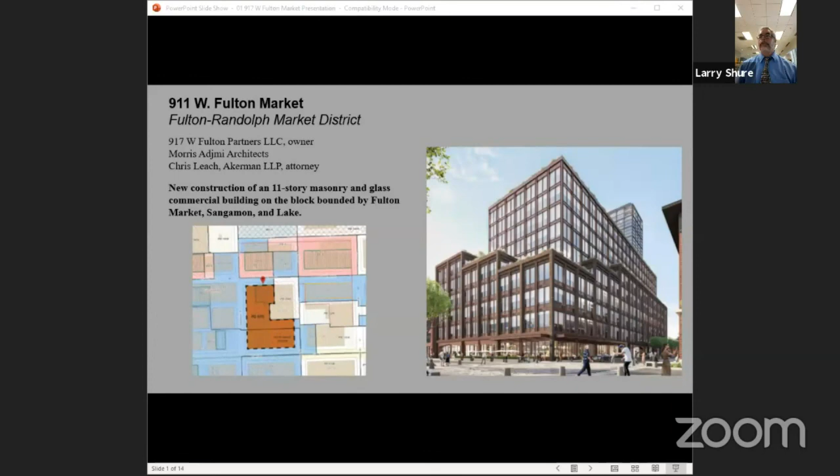The historic 6-story Davis and Rankin building at 900 West Lake is proposed to be incorporated into this development. While no changes are proposed for the primary south and east elevations, the applicant intends to connect this building to the new development through an atrium on the west elevation.

The upper floors of the building are proposed to be connected through a series of sky bridges. Where connections are proposed, the existing window openings will be extended downward, while the current window heights and widths will be maintained. Because these modifications are on a secondary elevation, maintain much of the original window openings and proportions, and will only be visible from within the atrium, staff recommends approval.

The roughly rectangular footprint of the proposed new construction is approximately 335 feet along Sangamon, 150 feet along Fulton Market, and 125 feet along Lake. The first 4 floors of the building extend all the way to the property line, maintaining the historic street wall found within the district. The heights of the lower 6 floors respond to the historic floor heights found within the district by stepping up and down in height, and the applicant has provided exhibits to better clarify how these heights relate to the adjacent historic buildings and infill construction.

The applicant has provided exhibits to illustrate some historic examples within the district which utilize changes in height on the primary elevations, and staff supports the proposed configuration.

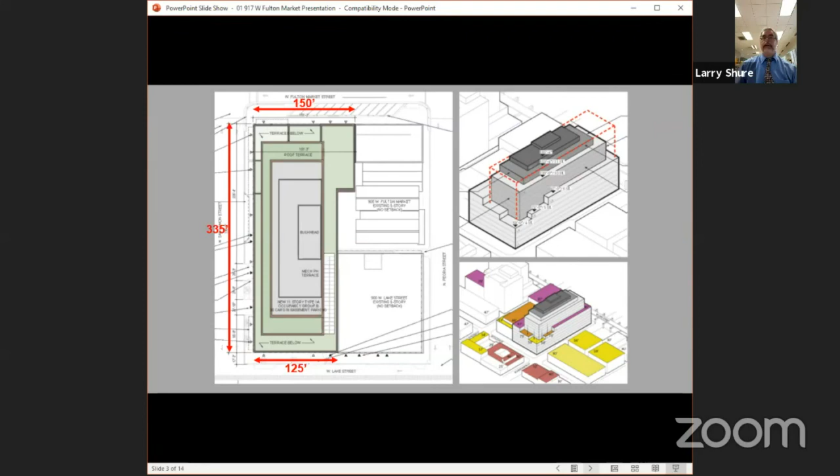In June of 2019, the committee approved a 12-story new construction building at 1043 West Fulton Market. The design incorporated a masonry structure approximately 91 feet in height and a taller inset tower with a height of 138 feet 4 inches. This building filled an entire block and did not abut any historic buildings.

The proposed 11th floor for this project creates a maximum height of 153 feet 4 inches, which exceeds the previously approved maximum height at 1043 Fulton Market by about 15 feet. Although this is a substantial increase in height, the size of the current site is more than 3 times larger than the site for 1043.

In order to address staff concerns about the visibility of the 11th floor, the applicant provided renderings from a number of vantage points within the district. Although not visible from directly in front of the building on Fulton Market, the 11th floor will be visible from areas further east on Fulton Market, south on Randolph, and north on Sangamon.

However, given the scale of the building, the overall design, the varying setbacks of the floors which break up the mass of the building and respond to the adjacent historic structures, staff recommends that the additional height will not adversely impact the historic characteristics of the district and that it be approved as proposed.

The applicant proposes a design which is informed by the historic modules and proportions found within the district. It incorporates primary and secondary vertical piers and inset spandrels. The upper floors have a more regular vertical pier width, contain large windows with a central dividing mullion and horizontal metal spandrels. The lower floors step up and down, which allow for the incorporation of outdoor terrace areas.

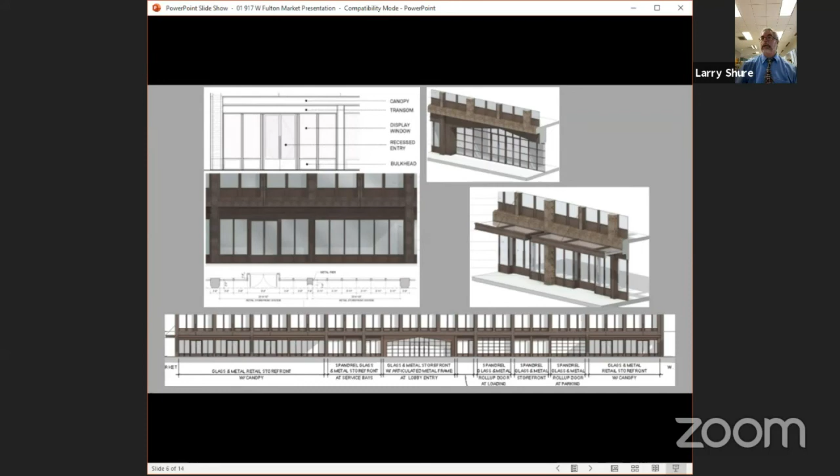The applicant proposes several metal and glass canopies, 1 on Fulton Market and 3 on Sangamon. These canopies span 2 storefront bays and are steel channels with etched glass roofs supported by diagonal metal struts. Because canopies historically provided protection for loading and unloading wholesale goods in the district, staff recommends approval of these new canopies as proposed.

Here are a couple of elevations just to give you an overall sense of the building. This is along Fulton Market, showing the step up and down of those lower floors, the inset 11th floor, and the mechanical enclosures above it.

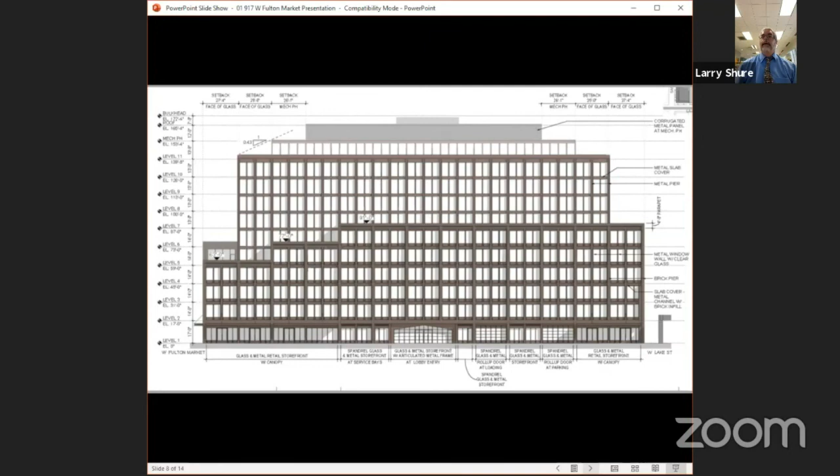This is the Sangamon elevation, again showing the lower brick floors and the metal clad floors above that. And finally, here's some sections and elevations of the east elevation. On the lower left on the upper image is the historic building to be incorporated into the project, and the bottom below that is a section.

So we are recommending approval with a number of conditions. First, that the quality of materials and design details as approved are important features in meeting the Commission's guidelines, and any significant changes to the approved design would require further review by the Permit Review Committee. Second, that the permit drawings shall include dimension details for all windows and storefronts, as well as brick patterns and mullion details.

Third, historic preservation staff shall review for approval all material samples prior to permit application. And fourth, that any signage, including any exterior lighting, shall be permitted separately and reviewed and approved by historic preservation staff prior to order and installation.

So that pretty much concludes my presentation. If there are any questions on that. Otherwise, I know that the development team is also at the meeting and they can also answer questions.

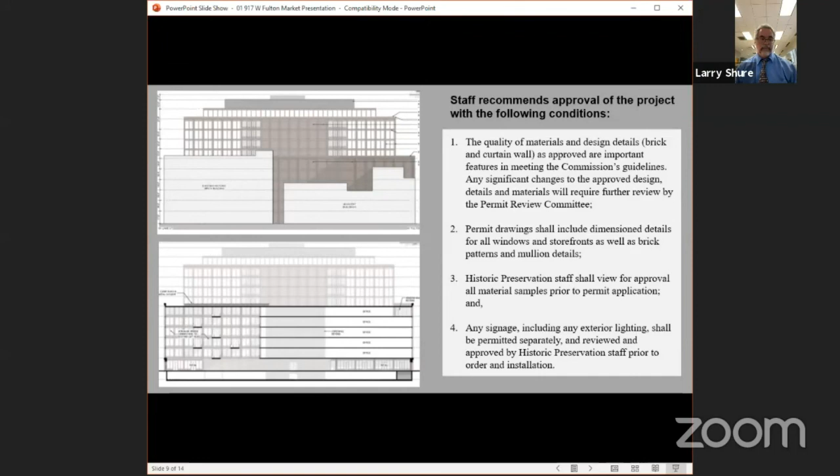Thank you, Larry. Commissioners, do you have any questions for Larry at this moment? And let me make sure I can see you. I have a question. Oh, thank you. Commissioner Jakovich. Hey, hi, Larry. Thank you. Just curious if there was any.

Well, first, just to clarify, is this abutting an adjacent building? That's one question. Is this abutting a historic building? And also, was there any additional color exploration for the building? Those are my questions.

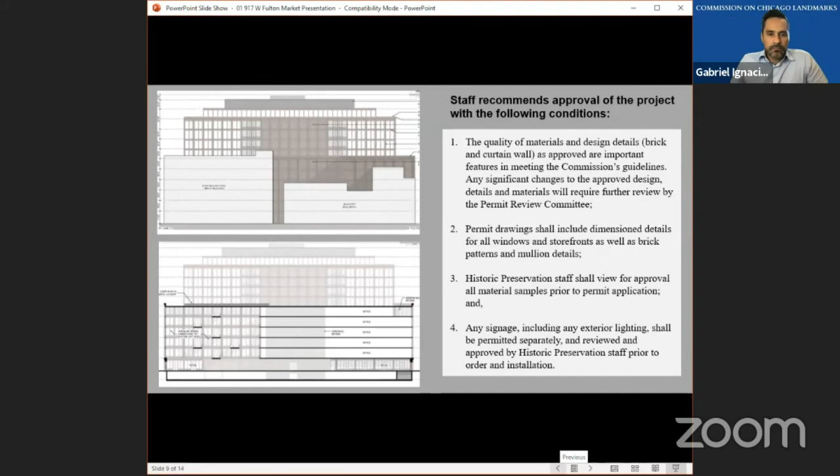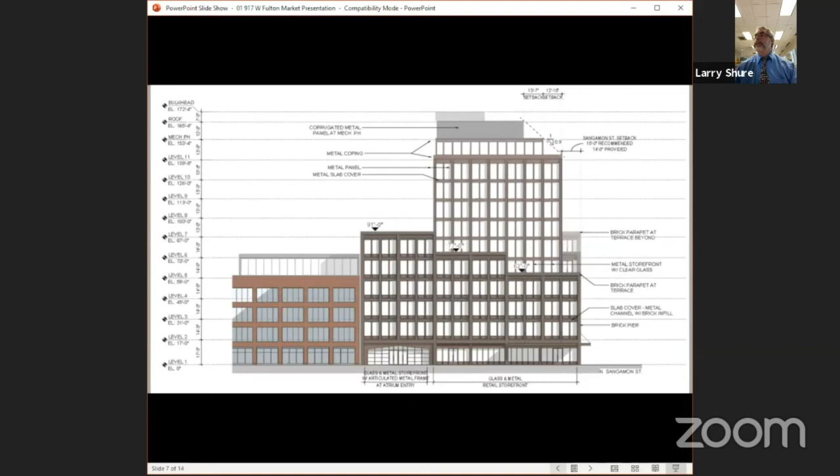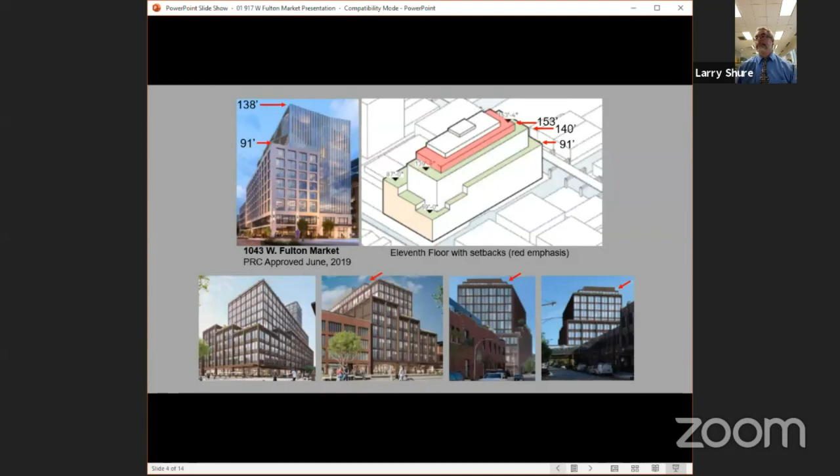So the project does abut the 900 West Lake, the Davis and Rankin building, which I think is an 1886 building. Let's see, I think there are probably some perspective renderings that show that a little bit more clearly. So it does attach to the secondary elevation, which is the west elevation of that building, and that's where that sort of open atrium with the sky bridges kind of attaches through.

Yeah, okay, this is pretty good. So this is the elevation along Lake Street, and this is the historic building. And so the height of the lower floors of the adjacent building are actually aligned with that, which actually is the tallest historic building in the district.

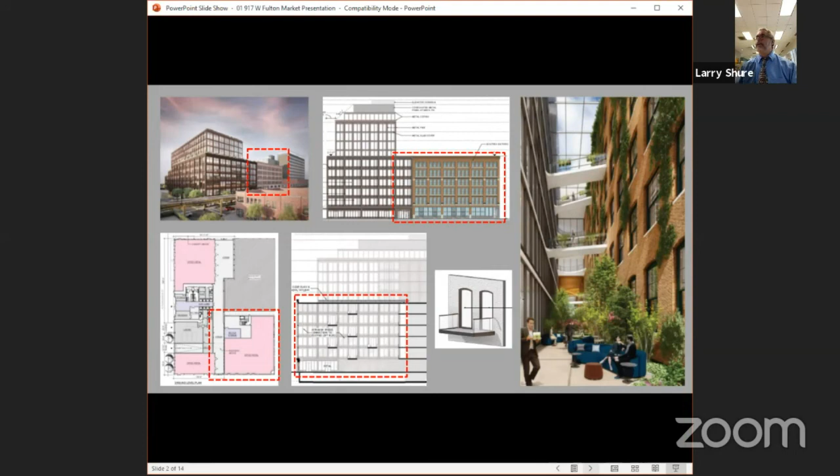As far as color goes, the initial proposal, I believe, was really for a black brick. And although there have been a number of new buildings in the area that incorporated black brick, we really didn't have much in the way of historic buildings that utilize black brick, probably because it really wasn't available. So the applicants were able to modify their proposed brick color to a dark brown, and there's some examples of that dark brown brick being used on some historic buildings in this center exhibit to the left in this particular slide.

I hope that answers your question.

Yeah, just one follow-up on that, maybe to the architect or to Larry too. With the historic building, whether there could be some acknowledgement of what's happening on the inside with the atrium, because it's not apparent on the outside, and potentially also creating a softer connection to the historic structure. We see that a lot - maybe there's a glass element that kind of opens it up and softens that connection between the new building and the old. So I'll leave that to... I believe there is a slight setback between the historic building and the new building, and I think the applicant's architects can address that better than I can.

Yeah, hi, this is Lucas Posada with Mooreside Architects, the architect on the project. Thanks for your time. I was having a hard time hearing the question, I don't know if you could repeat it. There's some echo in the background on everyone. Would you mind repeating the question, please?

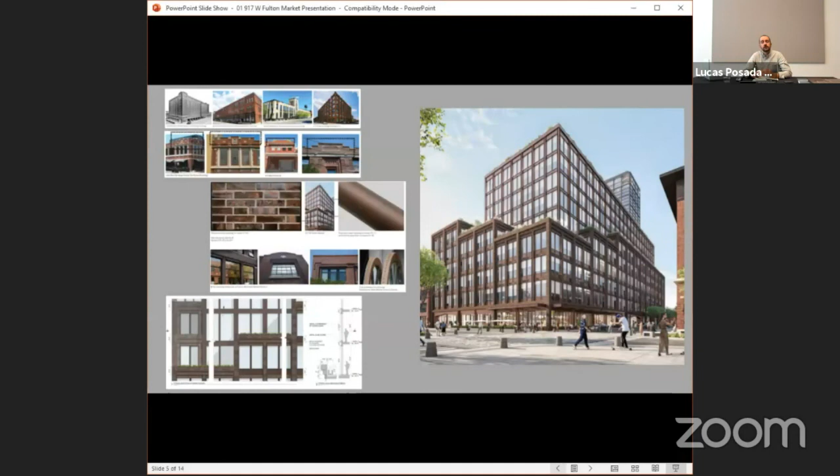So we'd probably have the parapet return, so it'd be a roof to roof type of condition, and then the skylight would be separated from that. I don't know if, Larry, if you're able to pull up that presentation—I'm happy to share my screen. I don't know if I have the ability to do that. But that's how we're envisioning that right now, so it can kind of stand apart from the historic building and just be its own system. Yeah, and there was a roof plan.

Yeah, right there. So you can see there's a little bit of a separation. We'd probably detail that so it's more of a standalone skylight, but it would be significant enough that it would really feel like an atrium within that space. I don't know if that addresses your question.

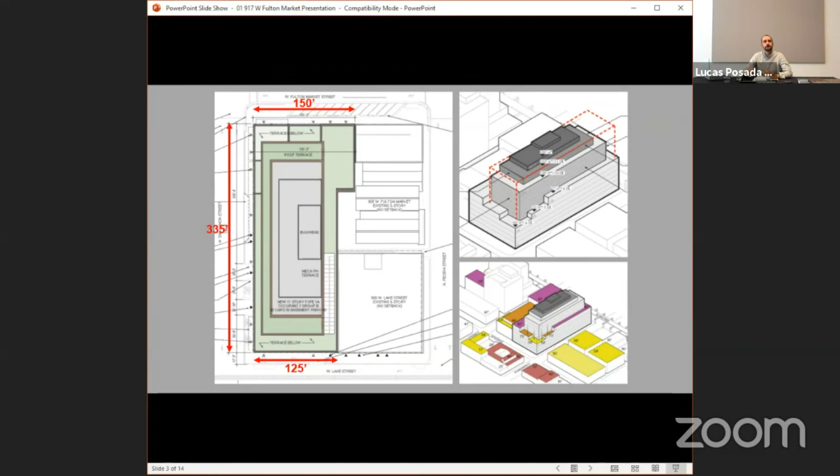Yeah, I was just flipping through the drawings here, and particularly I was curious about the detailing behind that. If you go to the last slide, it has a detail of the section.

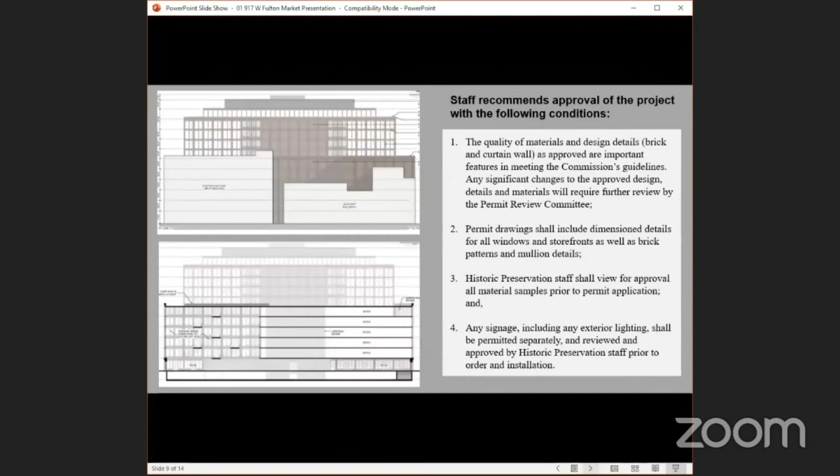If you look at the bottom left image, that's a long longitudinal section through the entire atrium. At the ground floor, you can actually connect from Lake Street, at the left of the image, to Fulton Market, at the right of the image. At the north end of the site, office floors would continue across, but on the left side, where the new building is adjacent to the historic 900 Lake building, that would be open, with just bridges connecting, and the roof coming across at the very top. So it would be open space, but not contiguous all the way to Lake Street.

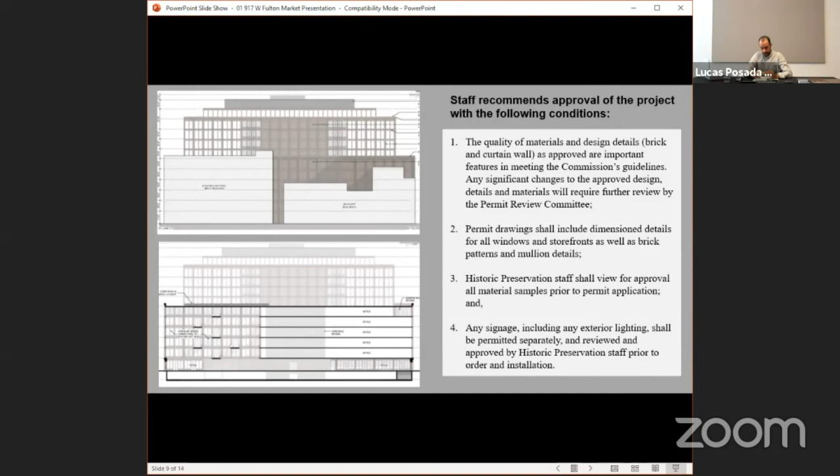Thank you, Commissioner Ponce. Commissioners, any additional questions? I don't see any hands.

If there's no further discussion, I'd like to request a motion to adopt the staff recommendations for the project. May I request a motion? I will move, Commissioner Osmann, adoption of the project. Commissioner Osmann has made a motion. Can I have a second? Second, Commissioner Hughes. Thank you, Commissioner Hughes has seconded the motion. Now I'm going to take a vote on the motion, and I will do a roll call.

Commissioner Jakovich, yes. Commissioner Ponce, yes. I also vote yes. So the motion carries unanimously.

Thank you very much to the team presenting today, Mr. Leach, Mr. Posada. Good luck with the project. It seems you still have a couple more steps before building permits, so good luck with that. Thank you very much. Thank you for being here. Thank you, everyone.

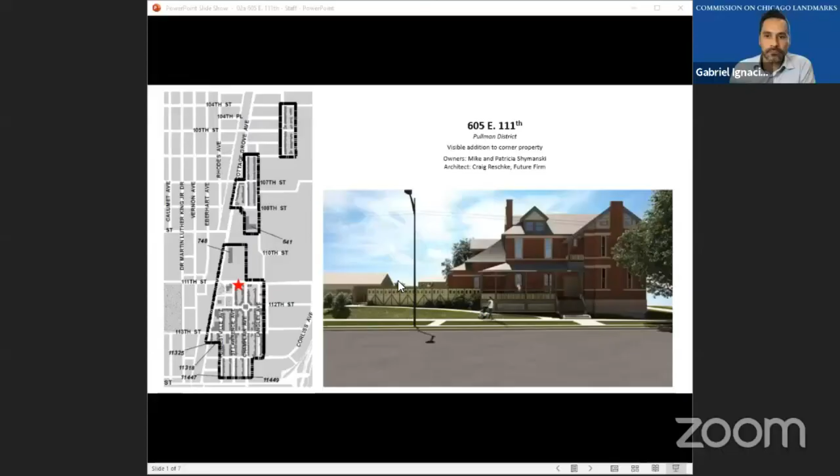Thank you, Commissioner. This property is located on the corner of 111th Street and St. Lawrence Avenue, with a 2.5-story masonry building on the site. The building was originally built as a single-family residence and was later converted to a private club for Pullman executives. Most recently, it has been used as a restaurant. The applicants contacted historic preservation staff in May 2021 to review their proposal to add an ADA accessible ramp, deck, and restoration of the front porch.

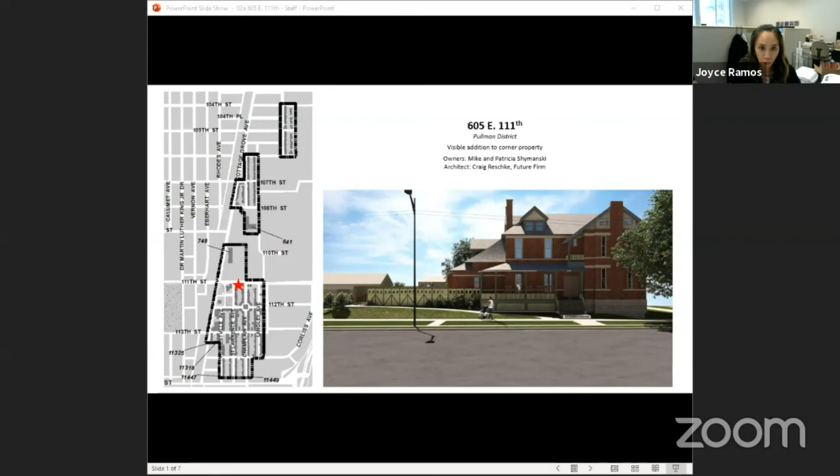The property is located on a 54-foot wide and 150-foot deep corner lot. The proposed scope of work includes an interior renovation for a new coffee shop and washrooms, and exterior improvements including restoration of the front porch, shown in blue, an ADA accessible ramp, shown in yellow, and a new deck, shown in purple, in the rear yard. These improvements will provide a key space to host visitors between visits to the Pullman National Monument and tours by the Pullman House Project.

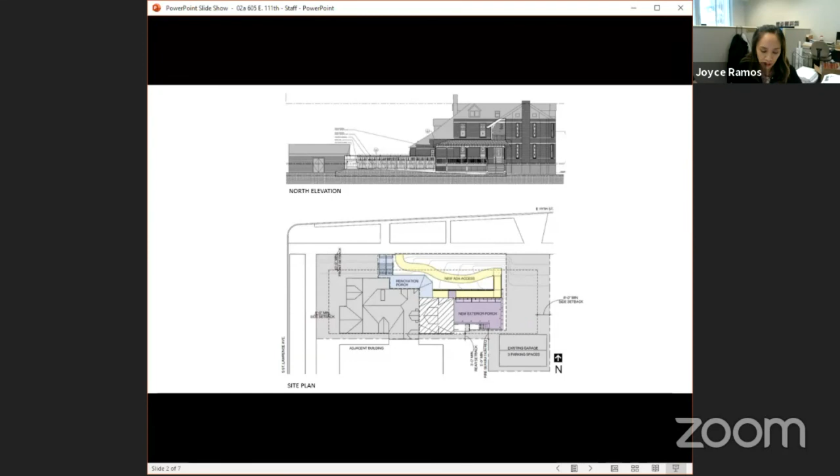The historic front porch on the north elevation facing 111th Street is currently enclosed and clad with wood boards. The applicants propose to restore the porch based on historic photographs and general historic characteristics evidenced on the building. The roof will be clad with asphalt shingles. The rafter tails will be replaced to match the profile of the existing rafter tails on the balcony above the porch. New steel columns faced with wood trim milled to match the profile of the columns above will be installed, along with a new railing with balusters matching the height, spacing, and detail shown in the historic photograph provided by the property owner. To increase the height of the top rail to meet code, the applicant proposes an additional metal guardrail on top of the wood top rail. Staff recommends approval of the porch as proposed.

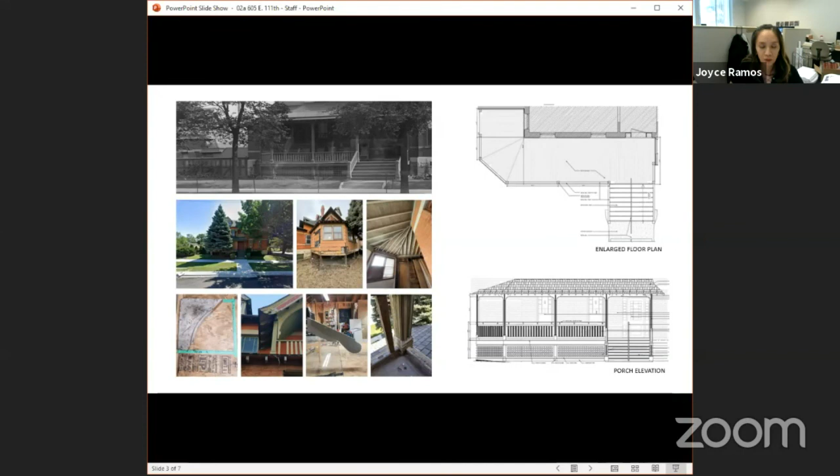A new raised wood deck is proposed off the rear elevation to provide outdoor seating for the new coffee shop. A solid wood fence with an integral Corten planter will enclose the deck on the north, east, and south elevations. Given that the proposed raised deck is significantly set back from the front facade and is sympathetic in its design and details, and does not negatively impact historic characteristics of the building or district, staff recommends approval of the deck as proposed.

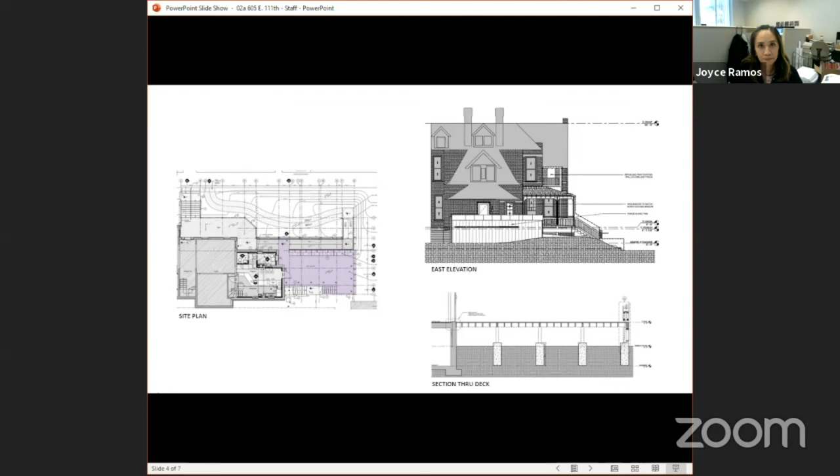The landscape will be modified to provide accessible access to the building. A concrete ramp with handrails is proposed to start at the sidewalk and will connect to a wood ramp, which eventually leads up to the front porch and deck.

A solid wood fence constructed with approximately the same design and proportions as shown in the historic photograph provided by the applicant is proposed to be installed to obscure the wood ramp from view, as well as to recreate a historic feature that was previously on the property.

The commission has approved a number of modifications to landmark buildings intended to address accessibility requirements. The commission reviews the location, size, and design of these proposals to confirm that such modifications are compatible with the landmark building and do not damage or obscure significant historic features.

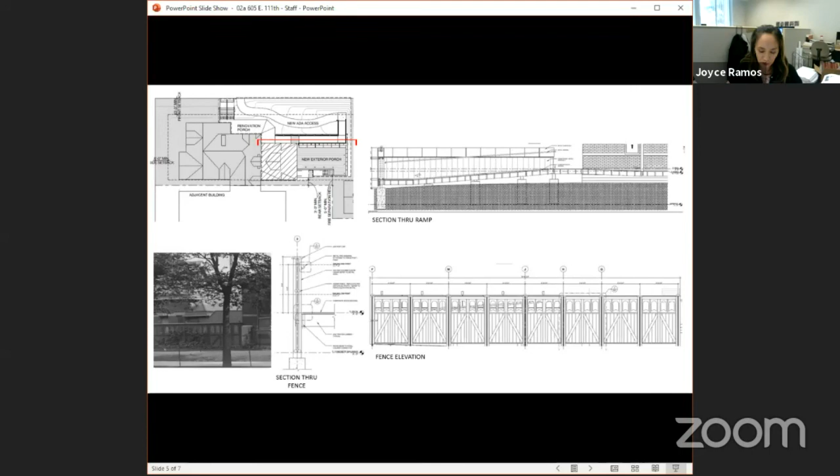Staff recommends that the accessible ramp and solid wood fence does not negatively impact the historic characteristics of the building or district and recommends approval as proposed. Staff recommends approval of the overall project as proposed.

The Alderman, the Beman Committee of the Pullman Civic Organization, and the National Park Service have reviewed the project and have all submitted letters of support, which were included in your packets. This concludes my presentation. The architect and the property owners are here if you have any questions. Thank you.

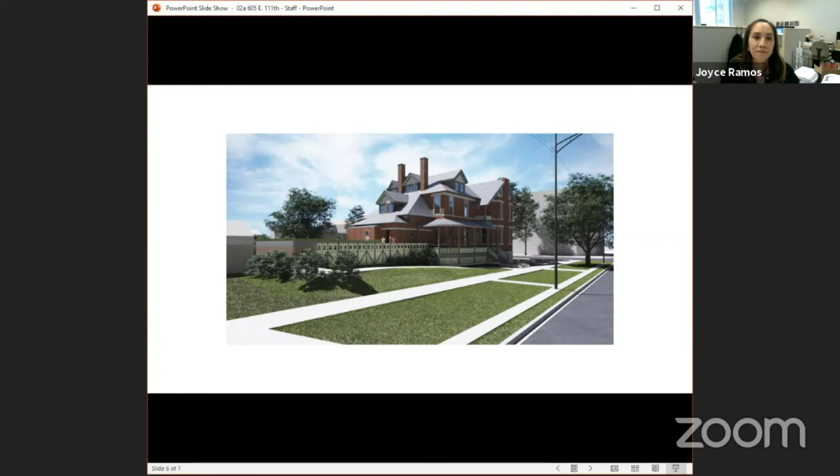Thank you, Joyce. Do the commissioners have any questions for Joyce, the staff? I don't see any hands. Okay.

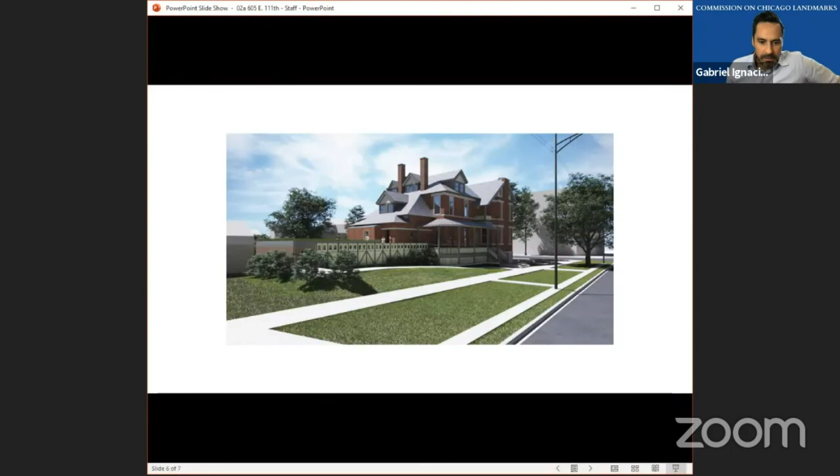Can we hear from the applicant and the representatives? Is the architect here as well? Yes, this is Craig Rushke, the architect. I believe the owners are on as well. Thank you, Joyce, for the presentation. I'm happy to answer any questions that come up.

We hear from the property owner and tell us a little bit about this project. Yes, this is Pat Szymanski, along with my husband, Michael. We own the property. The plan is that the property will be developed with the coffee shop and an accessible ramp to access the back to the deck and to the front veranda porch.

The most impactful part of the project, of course, is the restoration of the veranda and the historic fence details, which will bring the property back into compliance with what the original plan for the building was, intending to complement the project that's going on across 111th Street, which is the restoration of the Pullman factory site for the Pullman National Monument.

The historic workers gate is directly across the street from this property. So there's a good alignment, and it'll be complemented over the next year and a half by CDOT's 111th Street restoration and re-landscaping plan that's underway, with construction expected to begin in the spring.

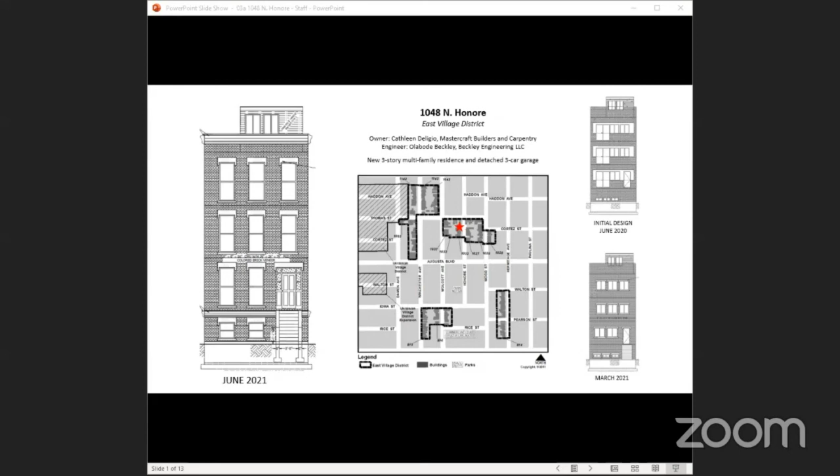Thank you, Chairwoman Aguirre. The subject property is currently a vacant lot located mid-block on Honore Street, just south of Thomas Street. Historic preservation staff received the original design submittal in June of 2020, as you can see on the front elevation on the upper right. During this time, staff has worked with the engineer to improve the design to ensure that the new building is compatible with and complements the existing significant historical and architectural features and qualities of the East Village District.

The proposed new construction project is a 3-story brick building, 40 foot 6 inches in height, with a raised entrance and a stair enclosure that leads up to the roof deck. The building is 20 feet in width and 2 foot 6 inches with side yard setbacks on the north and south. The front side yard setback is 9 foot 4 inches and is in keeping with the front setbacks on the west side of Honore Street.

The detached 3-car garage with a roof deck is proposed to be located at the rear of the property with alley access and to be clad in fiber cement siding.

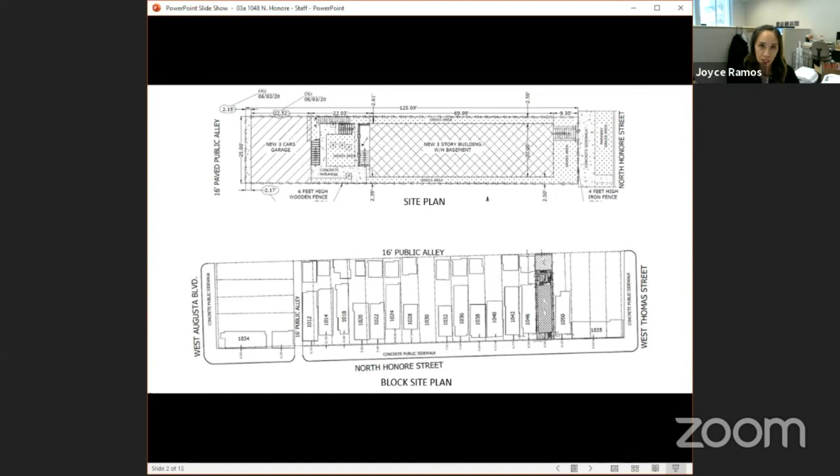Predominant historic characteristics in the district include masonry buildings with tall double-hung windows trimmed with stone window hoods. The applicant has proposed a standard size face brick in various shades of red for the front facade and wraps 6 foot 5 inches on both side facades. The remainder of the side facades, as well as the rear facade, stair enclosure, and garage, is proposed to be clad in fiber cement siding with a faux wood grain finish in a light tan color.

Due to the height of the building and visibility of the side elevation, staff recommends that the color of the fiber cement siding shall match the color of the brick with a smooth finish and a 4-inch lap exposure. Since the proposed new building is taller than the buildings immediately adjacent to it and the side elevations will be visible, staff recommends increasing the length of the brick wrap on the side elevations to a minimum of 20 feet. The front facade will have a 2 foot tall ornamental stone coping and a stone water table.

The windows are proposed to be solid wood, 1/1 double hung windows with stone hoods. The historic proportions and massings are in keeping with the current proposals. Staff recommends removing the stone window hoods on the basement windows in order to provide a visual gap between the top of the windows and the bottom of the water table.

Typical historic doors in the district include double doors as well as doors with side lights and transom windows. The proposed front entrance is recessed and consists of a single door with side lights and also features a generously wide front stair. The stairs are proposed to be constructed out of concrete with concrete wing walls.

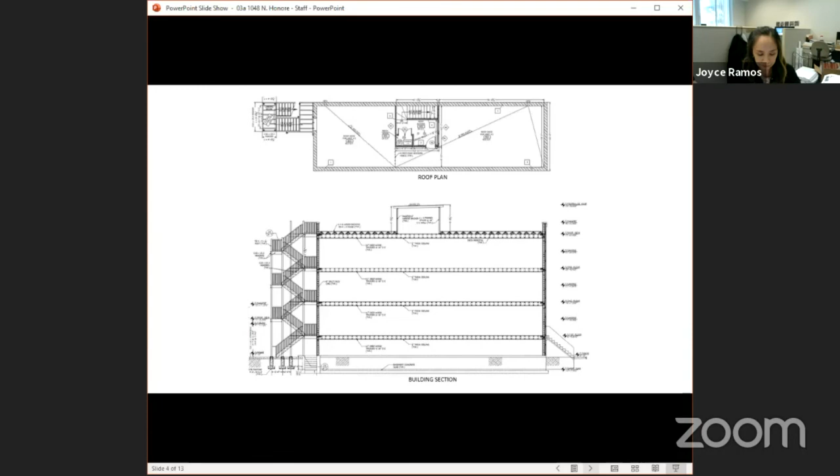So again, the proposed building is a 3-story masonry building, 40 foot 6 inches tall with a stoop height of 6 foot 6 inches, which is taller than the other buildings on the block. In order to provide more historic context, staff had suggested that the applicant consider building heights on other streets to demonstrate that there are historic buildings comparable with the proposed overall building height that exist in the wider context of the district.

Staff was able to locate other buildings on Winchester that range between 40 feet to 42 feet in height. And while the proposed height of 40 foot 6 inches is taller than the immediately adjacent buildings on Honore Street, there is precedence for taller historic buildings in the wider context of the district.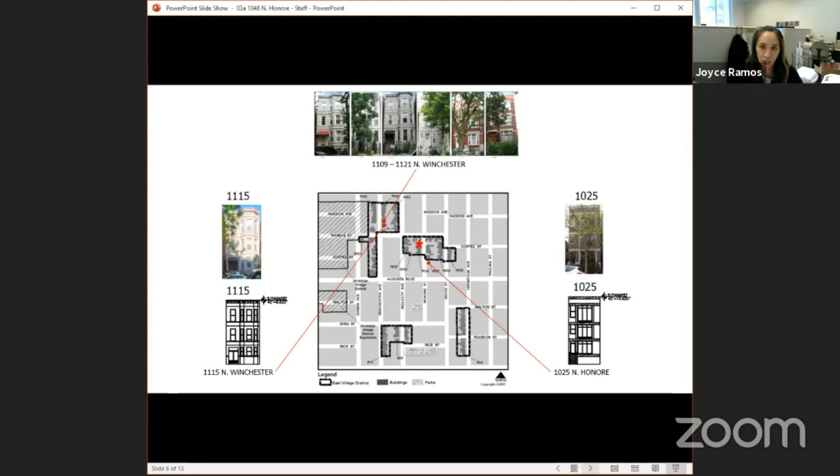So this is just going back to the streetscape elevation that we previously saw on Honore Street. The stoop heights range from 1 foot 4 inches to 3 foot 11 inches. The applicant has proposed a stoop height of approximately 6 foot 6 inches, which is significantly higher than the adjacent buildings on Honorary Street.

Additionally, the taller buildings staff found on Winchester Street have an approximate stoop height of 4 foot 1 inches. Staff recommends that the proposed stoop height be lowered to 4 feet to be in keeping with the adjacent buildings on Honore Street and with other buildings within the district comparable in overall height. Consequently, if the stoop height is reduced, the overall height of the building will also be reduced and will be more compatible with the other building heights in its immediate context.

Staff recommends approval of the project with the conditions mentioned during the presentation and also summarized here on this slide. Alderman Brian Hopkins and the East Village Association have received a copy of this most recent proposal for review, but have not provided any comments. This concludes my presentation. The structural engineer and the property owner are here if you have any questions. Thank you.

Thank you, Joyce. Commissioners, do you have any questions for Joyce at this moment? And let me make sure... okay.

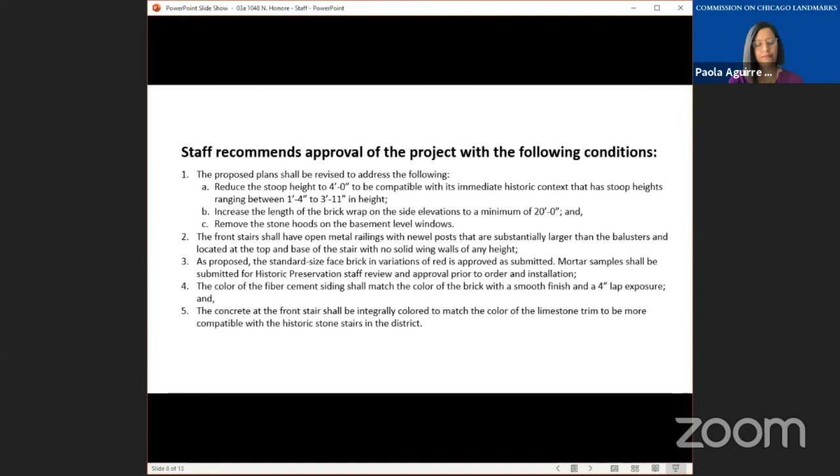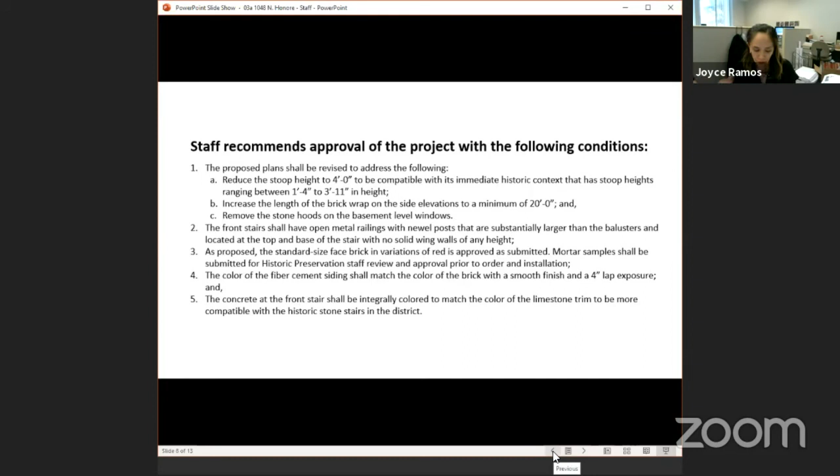Yeah, so first of all, the building height. Due to the building height, this further increases the visibility of the side elevations as it would rise above the immediately adjacent buildings. So typically staff would recommend like a 15 to 20 foot brick wrap. And while the face brick on historic buildings does only wrap around to the side elevation a few inches, the remainder of the side elevations are clad in common brick.

This applicant is proposing fiber cement siding, which is acceptable, but fiber cement siding is an inferior material, and it's not a material that was historically used in the district. So this is why staff is recommending the brick wrap be increased to a minimum of 20 feet in order to reduce the visibility and also minimize the difference in material.

Thank you. Commissioners, do you have any?

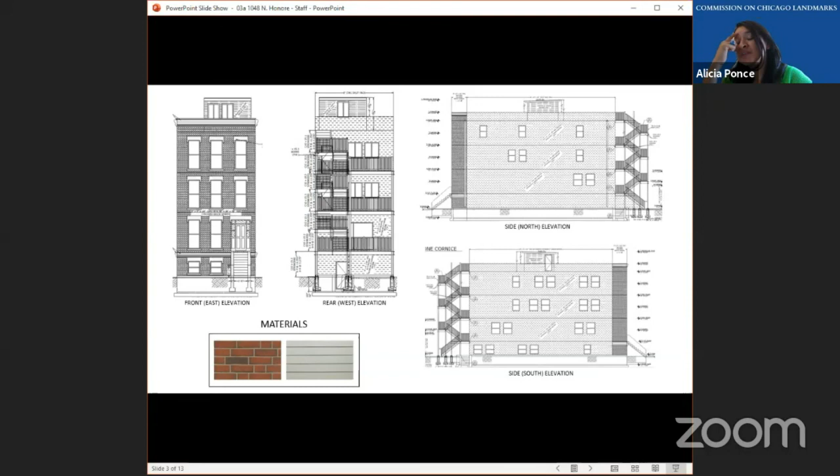I also have a question, and actually this is a good slide to refer to on the windows. Can you clarify, there were other drawings that showed proposed window sizes and scale. Can you clarify on how the proposed design exhibits the general characteristics within the district?

The other buildings in the district that are similar, like brick buildings, have taller, slimmer windows with space in between them. And so we felt... I don't know if you want to go back to the first slide.

If you look at the March 2021 iteration of this submittal, the applicant had proposed smaller windows, which didn't look proportional to the building or to the other windows in the district. So we worked together to find a proposal that would be more compatible with the district.

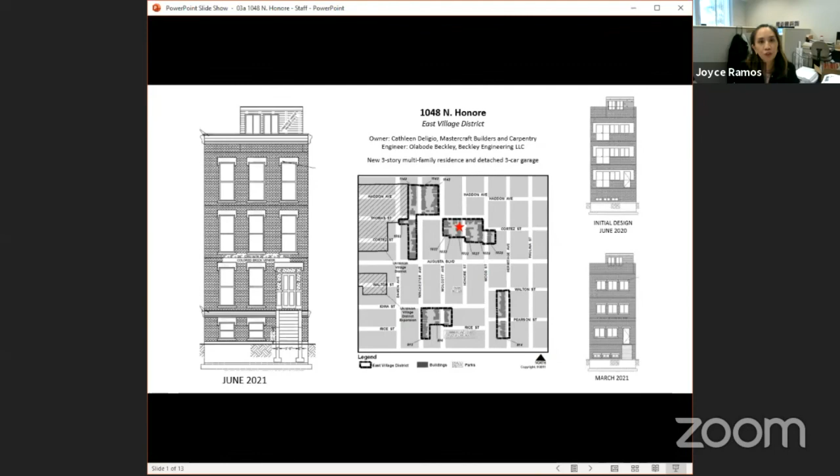So from what we're seeing here, that's the proposed and the approved. The one on the left labeled June 2021 is what the applicant most recently submitted, and we're recommending approval for that size of the windows. The ones on the right side just show the design evolution of the project. Okay, thank you.

Thank you, Commissioner Ponce. Commissioners, any questions for Joyce at the moment? Excuse me.

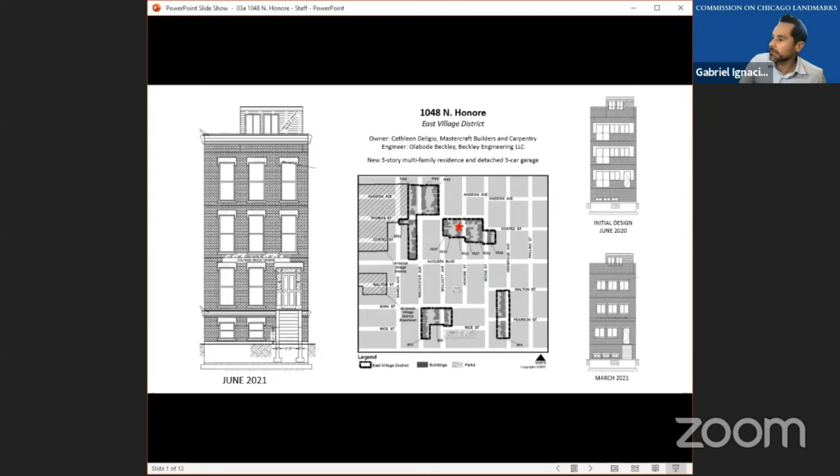Go ahead, Commissioner. Yeah, I think that, thank you for explaining the evolution. I think it's been a good one. So it's a good work back and forth with the applicant, and much better proportions now.

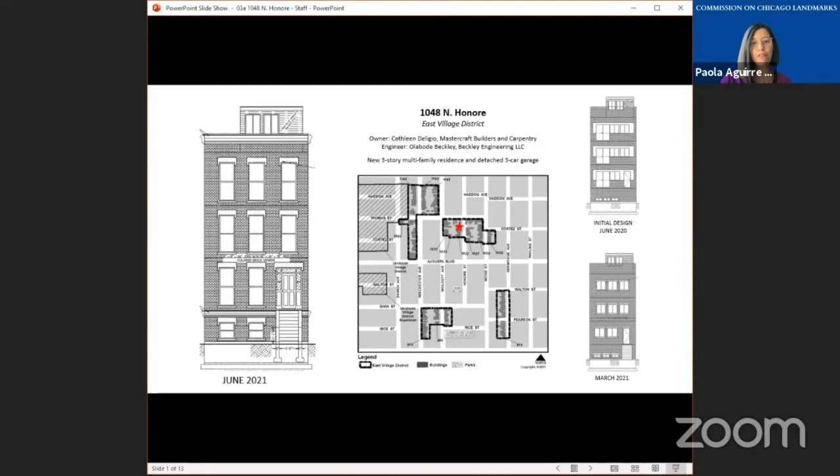Thank you, Commissioner Ignacio. I think this is a great segue to hear from the applicant and the representatives. Can we please hear from the project?

I think I heard engineer, Mr. Beckley. I don't think we can hear you. I might be incorrect, but I don't think there's any sound if you're speaking. Can anyone else hear him? No, Mr. Beckley, we cannot hear you.

Hey, let's see, we can hear you now. You can hear me now. Thank you. I just want to say good afternoon to the commission and to Joyce Ramos for working with me diligently to arrive at a very good solution.

Out of all the requests that she gave us, number one, review comment number 1A, we just want to refer to CBC 10, the old code now, CBC 10, 13-160-05, and on the current code, CBC 2019, section 1006.3.3 for single exit requirement for below the grade plane, something.

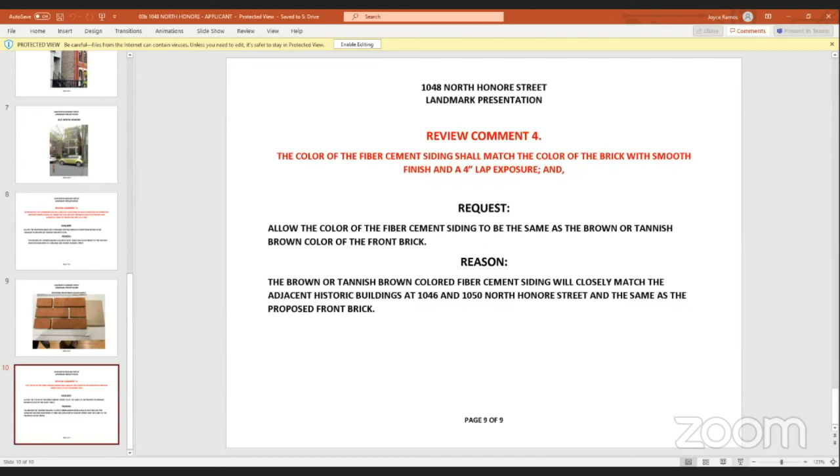And also review comment number 4, we're also proposing that we should have the same brown tannish color for the fiber cement siding so that everything will blend in. That's all our comments.

Thank you, Mr. Beckley. Joyce, would you mind addressing some of these comments and requests in context of your previous conversations and your recommendations, please?

I know you're... So let's see, going back to, I don't think there is a slide for this one, but for the window heights in the basement, let's see, I don't have the drawings here, but I believe that they're proposed right now to be 4 feet high. And that can still, and you said that it has to be 3 foot high in order to meet code. Is that correct, Mr. Beckley?

Actually, my staff did not update the window schedule. The actual, we have right now, because I measured it on the AutoCAD, and the elevation is 3 feet 1.58 inches rough opening of the window right now. I just found out that they did not update the window schedule. I'm sorry about that.

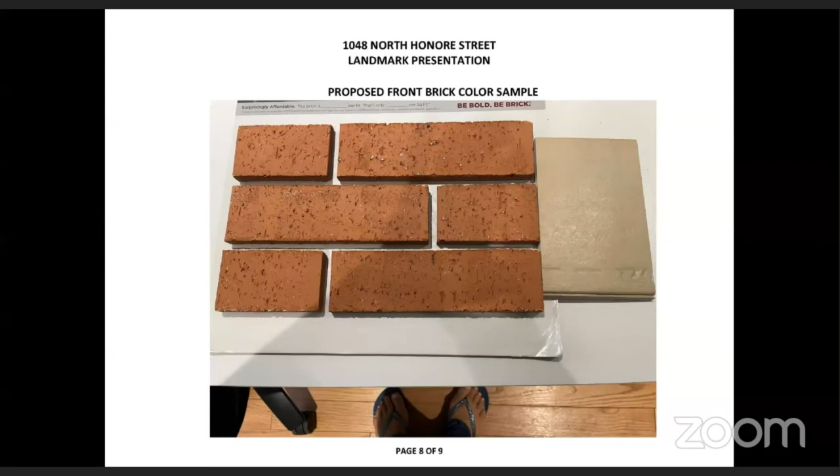Let's see. Yeah, excuse me, Mr. Beckley. We have a structural problem out there because the more we go down, the more we affect the adjacent building. They are very close to the property line, 2.5 feet.

If I understand correctly, Mr. Beckley, what Joyce is suggesting, and Joyce please correct me, is that the floor height can be modified to accommodate the total height suggested, not necessarily going into basement excavation. Is that a correct assumption? I just put up the building section here on the screen.

If it's completely not possible to excavate more than proposed, I think there's still an opportunity to reduce the floor to floor heights, which are approximately 10'2", 10'3" for each floor. I know there are these 12-inch deep wood trusses, making the floor to floor height like 9 feet, but still there are a couple inches that could be taken out of each floor to reduce the overall height.

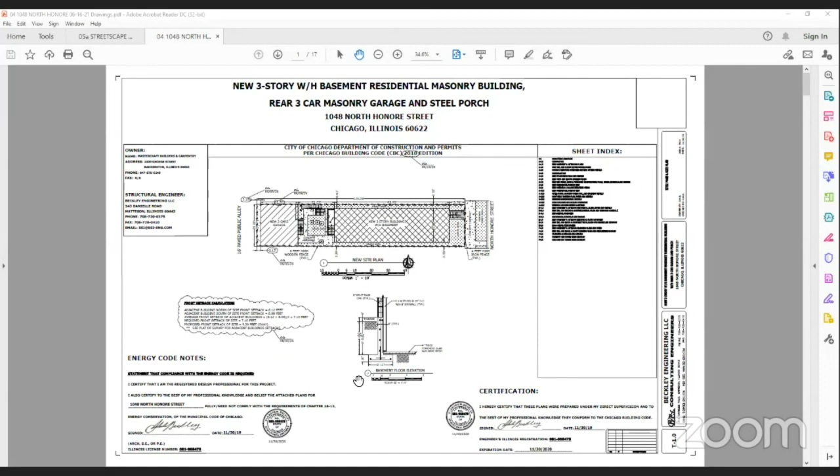I'm sorry, Mr. Beckley, is there a sheet in your drawing set you wanted me to refer to? 15.0, the last page. Can we just clarify one thing: what are we trying, how much are we trying to reduce the building height?

Originally like 4 feet. 4 feet is impossible, because if you look at the story height, 10 feet, if I take 1 foot, 1 foot, 1 foot, 1 foot off, that is story height, and we have to account for 12 inches depth for the roof joists, floor joists. So my ceiling height will not be what is supposed to be per code.

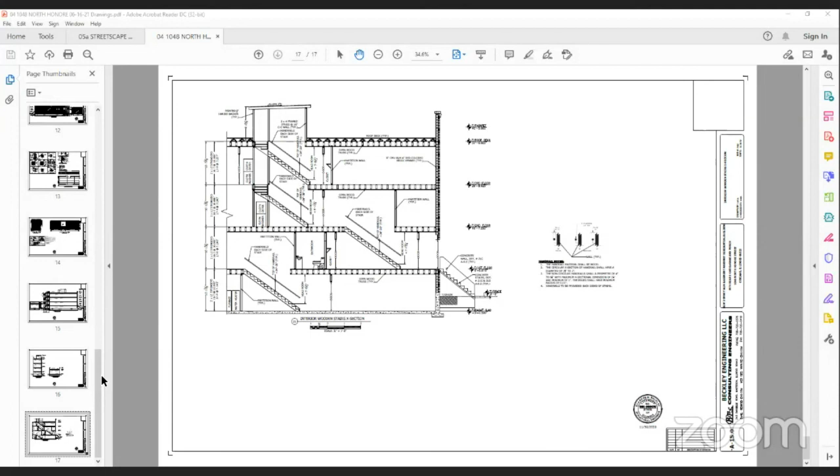Another suggestion, I know you have required window heights. You can also provide window wells in order to have them go below grade, but the window wells will still provide that access that's required. So that's also another option.

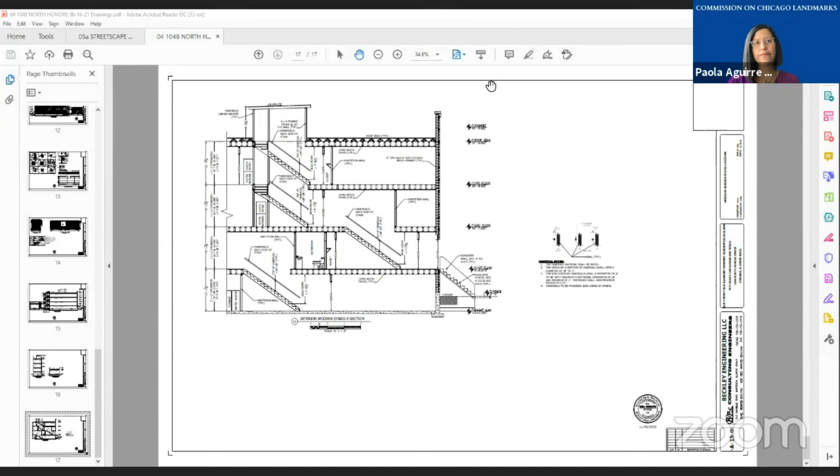Thank you, Joyce. Thank you, Mr. Beckley. May I invite other commissioners to weigh in on this aspect, either with questions or insights? I think it would be good to see the streetscape elevation again, to understand what we're trying to accomplish with the 4 feet.

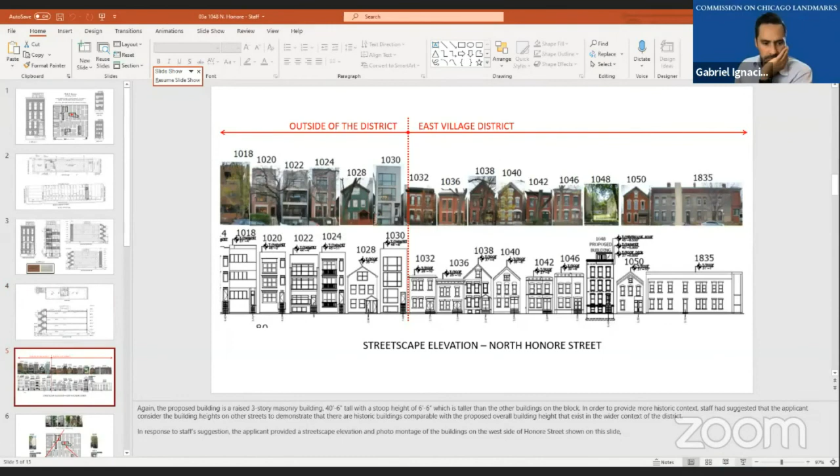So sorry. There we go. So here is the proposed new building, which is 40 foot 6 inches in height. And then the immediately adjacent buildings are 30 foot 6 inches and 31 foot 10 inches high.

Joyce, is there a reference here to the comparative building in height you showed before, but is there a reference about how much taller, what is the proportion we're trying to preserve in relationship to the adjacent buildings? It's obviously standing out from the block, but yeah, go ahead.

You could definitely look at the wider context of the district. So on this slide, the applicant had found 1115 North Winchester, located within the district, and in this building he had measured it to be 40 foot, like 9 inches high. So that's also a 3-story, well, this is a 3-story stone building.

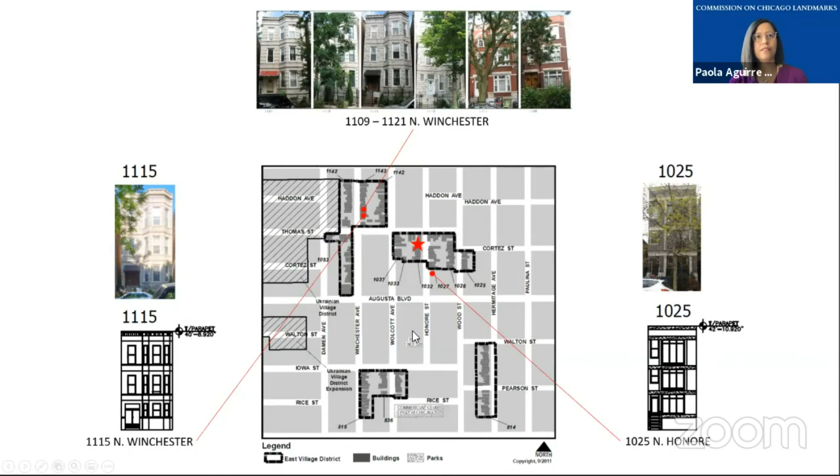Okay. It sounds like the height, can you go back to the section please, the slide on the section, Joyce? Sorry, that one. And that's the previous one, yes. So sounds like the stoop.

Another thing, you can also take out the height of the parapet. I know the applicant is proposing for the entire roof to be a roof deck. Maybe if the front portion isn't a roof deck, we wouldn't have to have that parapet be that required 3 foot 6 inches high.

Right, which they're probably required to have that to make that function possible, I assume. Mr. Beckley, have you considered that?

Just lowering the height of the parapet in order to at least accommodate some of the height recommendations? I already looked at that. We are not talking about the overall height of the building. If I lower that parapet wall, I will be breaking the code to meet the minimum of 42 inches above our deck floor. So right now it's at 42 inches, a little bit higher. If I adjust that, I won't meet that safety code of 42 inches above deck floor.

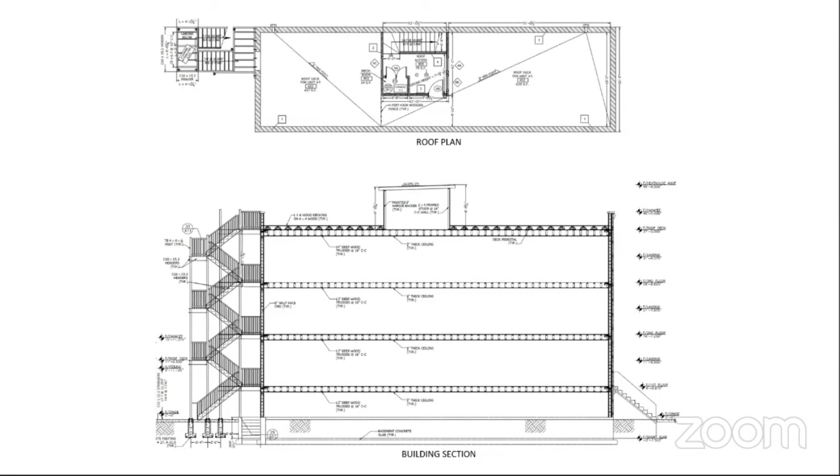Can we go to the elevation view, please? With the rest of the properties. Sorry. There you go.

Is there a height ordinance in this particular historic district that says the building can't be above this particular height? No, but we would just like to keep the building heights compatible with the other buildings within the district. So there is no set number.

Mr. Beckley, the zoning code does have a height limit for top of roof deck. If you check the zoning code, I think it's about 30 feet, maybe 40 feet, I don't remember right now. And also the building code has 50 feet for the type of building we're building, if I remember. Zoning code also has one. Let me check my code matrix, I can tell you.

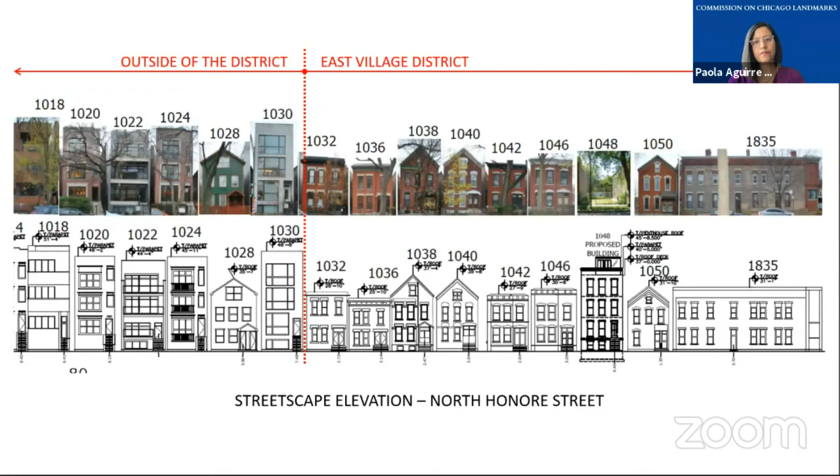Okay, thank you, Commissioner Hughes. Are there any concerns from the rest of the commissioners about this? Chairman, Commissioner Jakevich, I would agree, but I do think the brick return definitely needs to be maintained if you're going to allow the height. I would support that. Commissioner Ponce, I agree as well.

Thank you, commissioners, this is Deanna. If I could just clarify, could we go to the slide with the conditions to make sure we are recording this accurately? You are eliminating 1A. Yes, ma'am. You are keeping 1B as proposed, as the staff condition states. What about 1C? Basement. Oh, we haven't gotten there yet.

We're discussing, just so you know, the stone hoods I'm talking about are just these here. I'm recommending to remove them just because they provide a visual gap between the top of the windows and the bottom of the water table, since there currently is none. The recommendation is to remove those, to take them out.

Okay, Mr. Beckley, we agree with that. You agree with that one? Yes. Okay, thank you, Deanna, for bringing that up. So in regard to staff recommendation number 1, we are removing 1A to allow the current proposed height of the building, and we are keeping recommendations 1B and C.

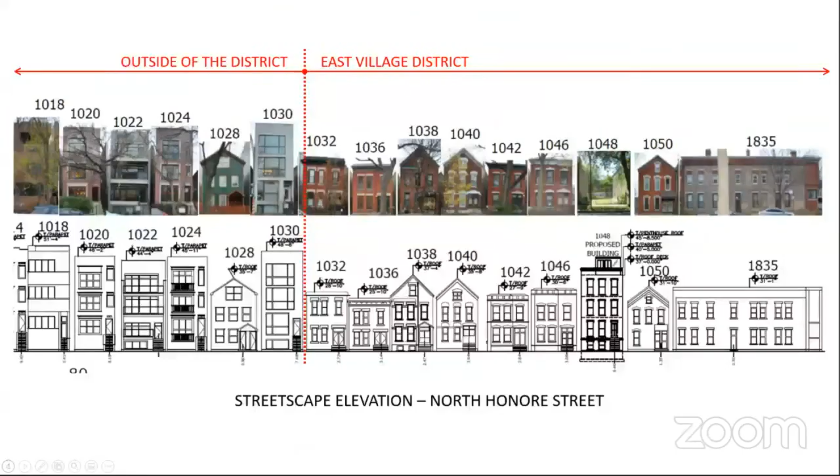Okay, and then number 3, we were approving the proposed red brick. This is what the applicant had submitted to use for the front facade. They proposed to use a red brick with fiber cement siding in a tan color. Mr. Beckley, I'm sorry if I didn't show this before, but he is proposing to change those materials to a more brownish tannish color brick, and also having the fiber cement siding match this color.

Am I saying that correctly? Yes, that's correct. So we understand this is the latest proposal from the applicant, and it's different from the one in the presentation. Is that correct? That's correct.

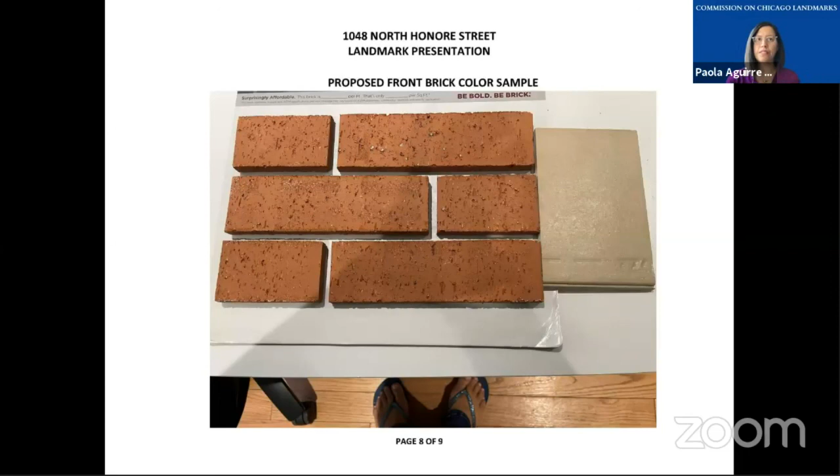So staff is fine with this. We would recommend approval for these materials, as long as the fiber cement siding has that 4-inch lap exposure and has a smooth finish. Great, okay, thank you.

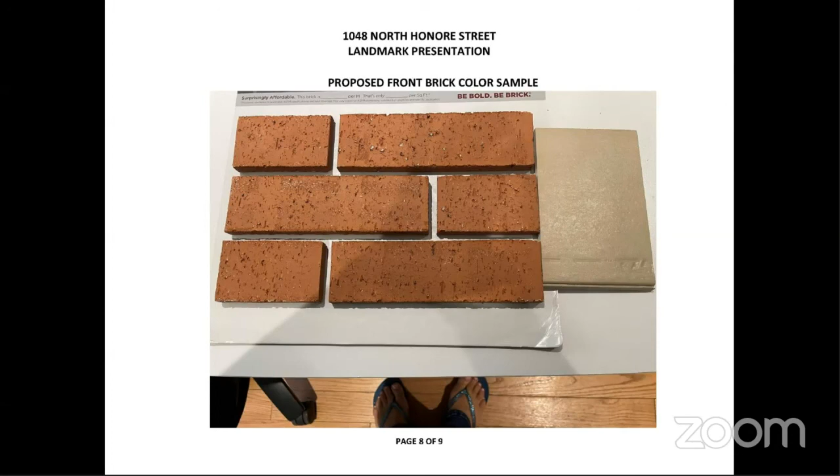All right, I'll go back to the slide. Yeah, thank you, I'm sorry, going back. No, it's okay. It's a lot of decisions today. Here we go. Okay, so it sounds like the last recommendation is about the concrete on the front stair there.

Okay, so yeah, I mean basically I just wanted to make sure the concrete wasn't going to come out to be very stark bright white, just to make sure the color is compatible with the limestone on the building. We agree with number 5.

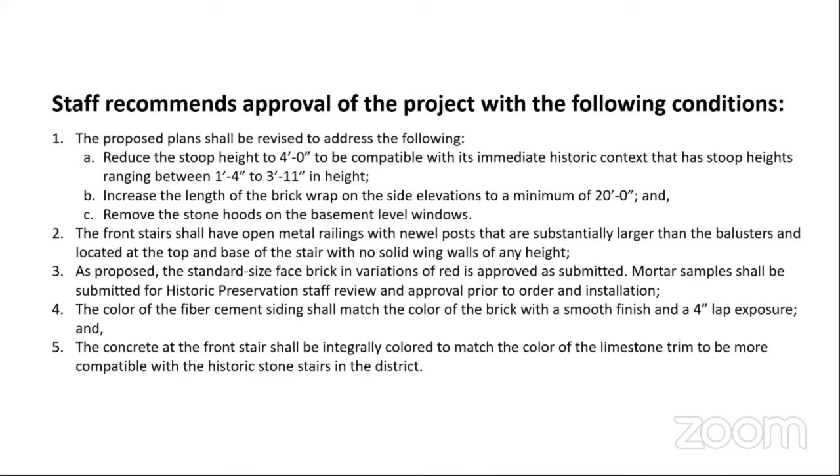Okay, thank you. So to recap all the recommendations from staff, we are all in agreement except for 1A. Is that correct? Yes. Joyce and staff, please record that adjustment to the recommendations. And with that adjustment, are there any questions from commissioners to the staff, to Joyce, or to Mr. Beckley, now that we've done the thorough review of all 5 recommendations for this project? No further questions.

Wonderful, thank you all. All right, if there's no further discussion, I would like to request a motion to adopt the staff recommendations with the mentioned adjustment for recommendation 1A, to remove recommendation 1A. And I would like to request a motion to approve this.

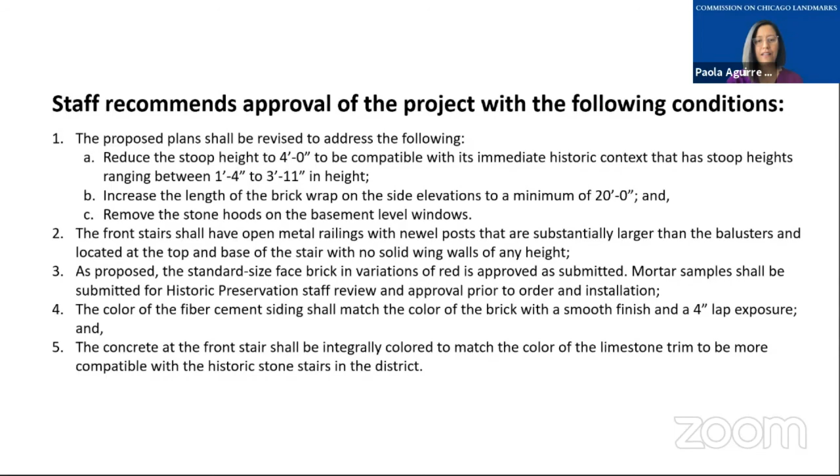So moved, Commissioner Hughes. Thank you, Commissioner Hughes has made a motion. Can I ask for a second motion? Second, Commissioner Jakovich. Thank you, Commissioner Ignacio. Now I'm going to take a roll call vote. Commissioner Osmond? I approve. Commissioner Ponce? Yes. Myself, Commissioner Aguirre, also vote yes, and the motion carries unanimously.

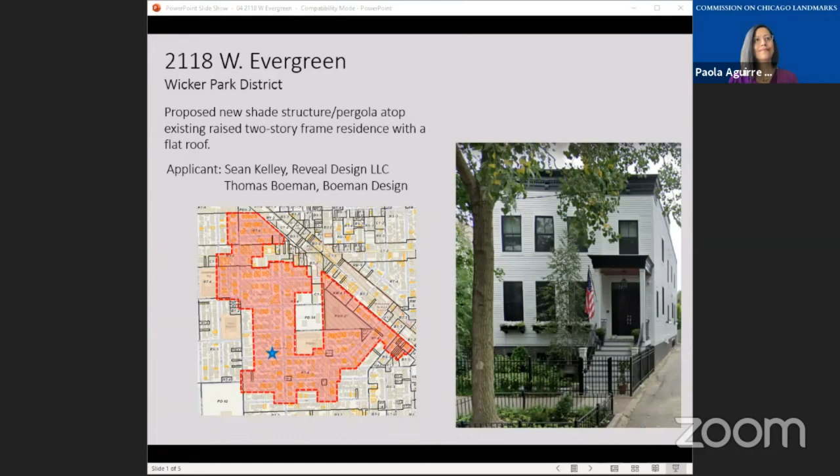Okay, next slide. So this proposal, the applicant is proposing to add a new shade structure to the existing roof deck of their property. The single-family house was constructed in 2017, and the design was reviewed and approved by the Permit Review Committee at that time. The building is 2 stories in height with a raised basement. The other thing to note is that there is currently a rooftop deck, which is accessed through a narrow stair enclosure on the building.

So the proposed steel roof trellis will feature aluminum louvers and is approximately 18 feet in length and 27 feet in width. Its southernmost post is set back approximately 46 feet behind the front facade and 60 feet from the front property line. The roof of the trellis is approximately 6 feet above the parapet for an overall height of 9 feet. This matches the height of the garage trellis next door at 1336 North Hoyne, but features a more substantial setback.

On the west side of the trellis, the applicant is proposing a composite screen that will extend 4 foot 2 inches above the existing parapet. On the east side will feature a laminated glass screen, which is approximately 2 foot 10 inches above the parapet.

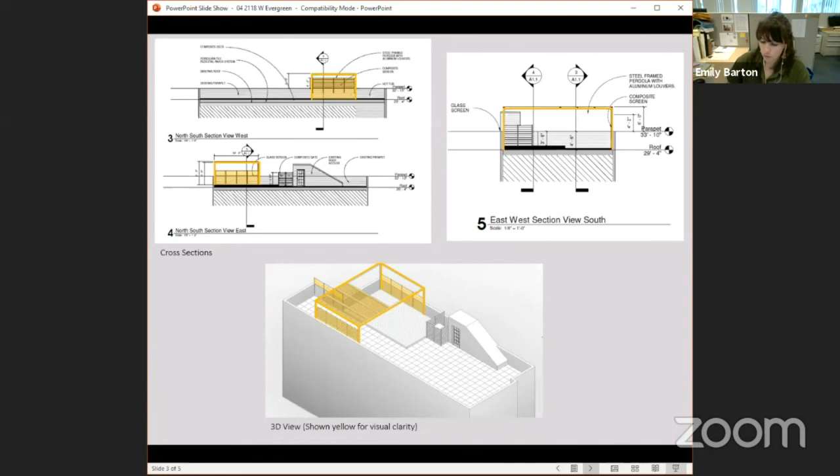So here's a plan so you can see it just a little bit better. Visible rooftop additions have been approved in Wicker Park before.

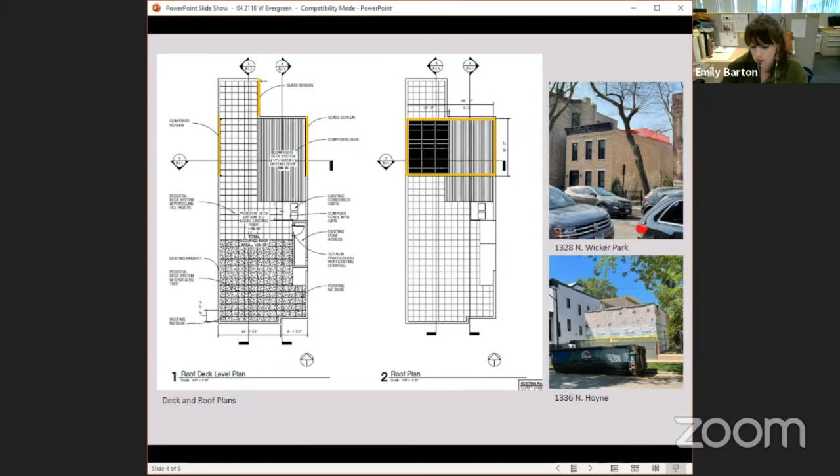Just last month, the committee approved a new visible rooftop addition at 1328 North Wicker Park. And next door at 1336 North Hoyne, the Permit Review Committee approved a garage with a visible roof trellis that similarly extends 6 feet above the parapet. In both cases, it was determined that the additions would not adversely impact the significant features of the property or district.

Based on the mock-up and previous approvals within the district, staff recommends that the proposed trellis will not have an adverse impact on the roof line of the building or overall district and may be approved. Staff further recommends that the steel, aluminum, and composite screen be finished in a dark, non-reflective color so as to match the color of the cornice and parapet.

An approval letter from the Wicker Park Committee was included in your packets, and I believe the owner and architect are both here if you have any questions for them or me.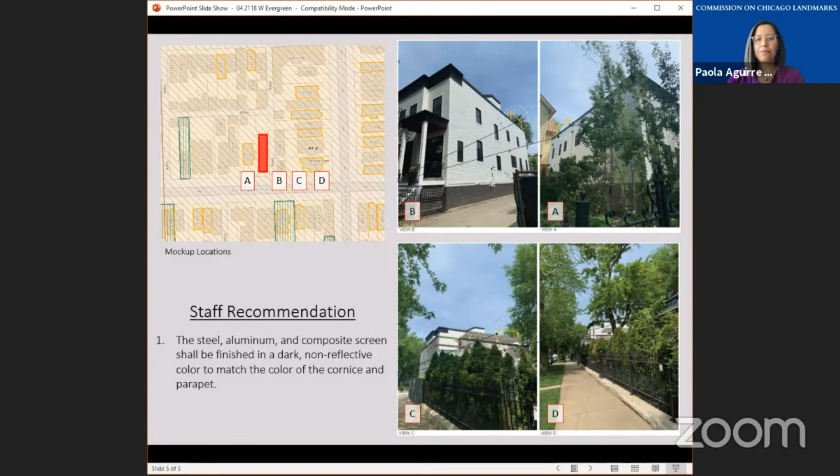I think the property owner is here. Hi, yes, that's me. Hi, hi everyone, good afternoon. Would you like to introduce yourself, please? Sure. Hi, my name is Heather Eaton. I, along with my husband, are both the property owners and residents at 2118 West Evergreen Avenue.

So thank you to Emily and thank you to the commissioners for hearing this permit proposal. Thank you for being here. It's a very wonderful building that you're bringing for review.

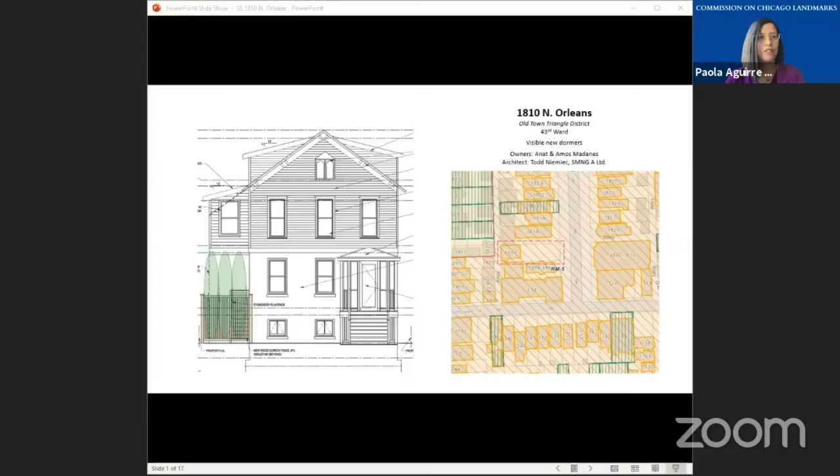Thank you, Chairwoman Aguirre. The property is a typical Chicago cottage with Italianate details that include a wood cornice and trim, constructed in the 1870s. The facades are clad in wood siding and painted glazed brick at the base on the front facade, and common brick on the side facades.

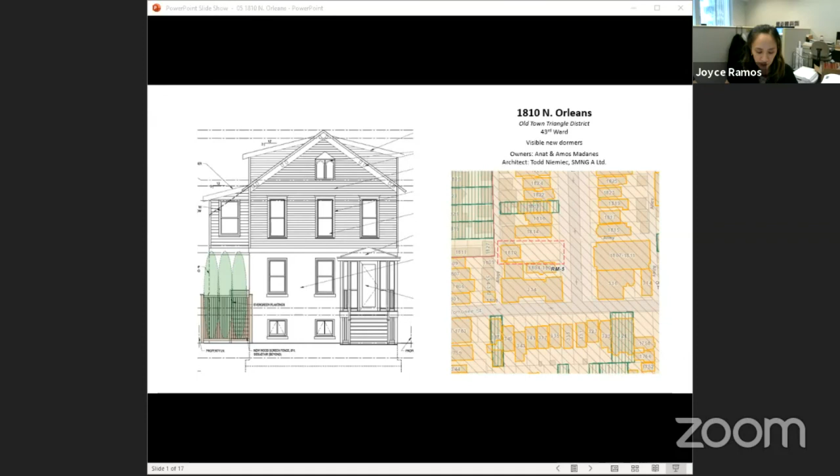In October 2020, the applicant contacted Historic Preservation staff with a proposal for exterior and interior renovations. They would like to preserve the building, but also make modifications to provide reasonable usable space within its very small structure, by building a new mezzanine between the existing second floor and attic roof, and to provide on-site parking where none is currently provided. The house is currently located at the rear of the lot, which is mid-block on Orleans Street.

According to fire insurance maps, the 1886 Robinson's Atlas and the 1906 Sanborn map show that the house was located at the front of the lot. The 1935 Sanborn map shows the house located at the rear of the lot, indicating that sometime between 1906 and 1935 the house was moved from its historic location. Also in the 1935 Sanborn map, it shows a frame side bay on the south elevation, which was not documented in previous fire insurance maps, indicating that this is not an original feature of the building.

However, the period of significance for the Old Town Triangle District is between 1872 and 1930. It is not clear when the side bay was added, but these maps suggest it may have been constructed prior to 1930, which would still be within the district's period of significance.

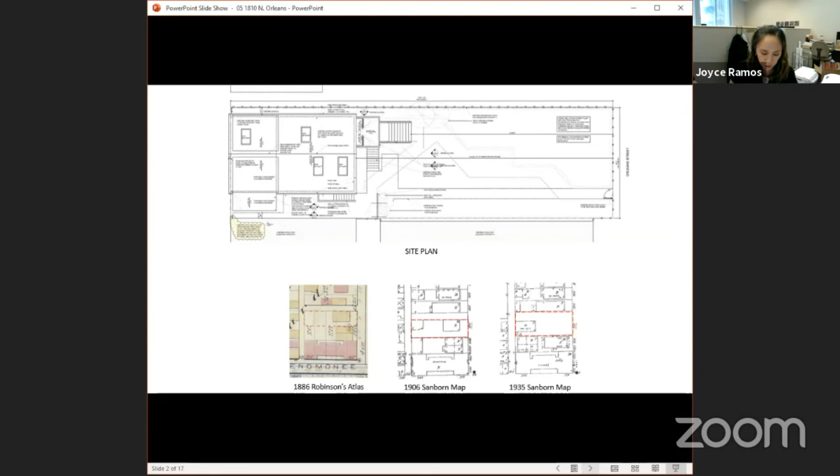On May 6, 2010, the commission adopted criteria to be used in evaluating whether proposed new dormers on front-facing gabled roof cottages in the Old Town Triangle District will have an adverse effect on the district, when such dormers should be visible from the public right-of-way. Staff reviewed the proposal pursuant to this criteria to determine the potential visibility of the proposed dormers.

In order to provide functional head height and space for a bedroom and bath on the second mezzanine floor, the applicants proposed to construct new north and south dormers that are 14 foot 11 inches in length and set back 25 foot 6 inches from the front facade. Both dormers together will span 24 foot 4 inches, the current width of the house. The top of the dormers are located 1 foot below the ridgeline, with a slope of 3 to 12. They are proposed to be clad with wood siding and asphalt shingles to match the main house.

Staff recommends that the dormers meet the established dormer guidelines, and that these dormers will be minimally visible given the substantial setback on the existing roof and the location of the building at the rear of the lot. The slope of the side bay roof currently matches the slope of the main house roof; however, maintaining this roof slope would not provide code-required allowable ceiling heights for habitable spaces.

The wood frame side bay is currently used as a stair enclosure, approximately 6 foot by 10 foot in plan. The applicant had a structural engineer evaluate the condition of the existing stair enclosure, who determined that it is unstable and out of plumb by several inches, indicating inadequate foundations, if any, under the enclosure walls. The engineer recommends that the stair enclosure is structurally unsound and not suitable for use.

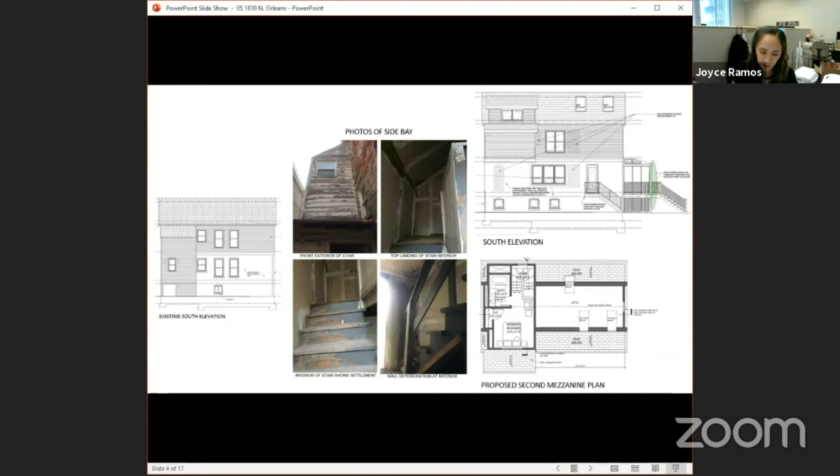The existing front porch is located on the east elevation facing Orleans Street, with the stairs running parallel to the front facade. The applicant is proposing to demolish the existing porch and replace it with stairs that provide a front approach and lead up to an 8'5" by 10'1" screened and covered porch.

The proposed design is characteristic of porches on Chicago cottages. However, historically, porches did not function as enclosed vestibules, as most 19th century houses have entrance foyers which serve this function. Commission guidelines indicate that front porches should not be enclosed. Staff recommends that the design of the new porch be revised to eliminate the proposed door and screen enclosure.

The building currently does not have any skylights. One new skylight is proposed on the north side of the gable, and 2 skylights are proposed on the south side of the gable, shown on the roof plan in yellow. Additionally, 1 new skylight is proposed to be installed on the new roof of the north dormer.

Staff recommends that the proposed skylights will not adversely impact significant historic characteristics of the property, and that the permit drawings for the skylights shall include dimensions, specifications, and installation details to verify that the projection of the skylights will be minimal, and that the frame color will match the color of the roof shingles in order to reduce visibility.

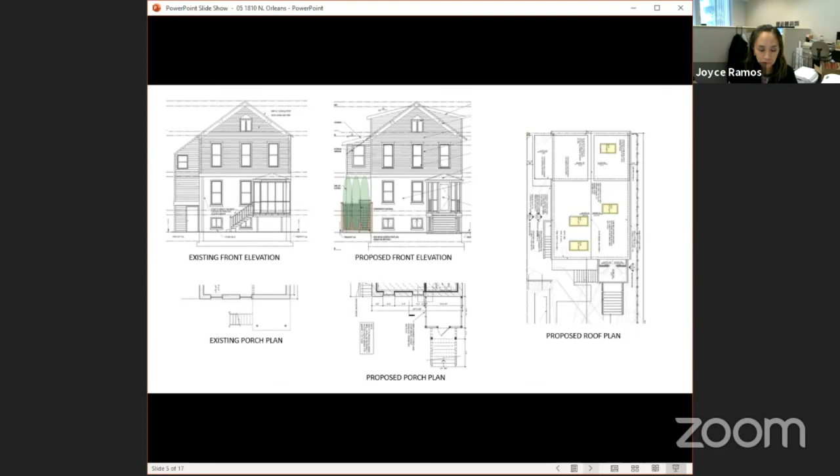In conclusion, staff recommends approval of the project with the conditions mentioned during the presentation and also summarized here on this slide. Both the alderman and the community group have been made aware of the project. The Old Town Triangle Association has submitted a letter of support. This concludes my presentation. The architect and property owners are here if you have any questions. Thank you.

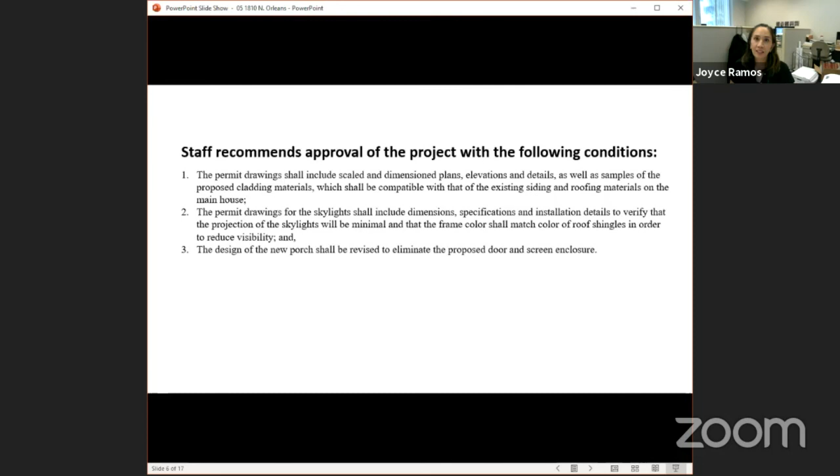Thank you, Joyce. Commissioners, do you have any questions for Joyce at this moment? I don't see any hands.

Okay, can we hear from the applicant? I think we have the project architect with us. Good afternoon, do you mind introducing yourself?

Yes, I'm Todd Niemiec, I'm a principal with SMNG A Architects. We've been working with the Madaneses. They live next door currently, and they want to preserve this real special piece of Old Town. It's a very modest property, so we're trying to get what we can out of it without impacting the historic nature of the structure. So we thank Joyce for her time and guidance working with us over a period of time, the staff and commissioners for your consideration.

Thank you, Mr. Niemiec. So what we're hearing, Joyce, is that the main recommendation in this project is the design of the porch, correct? Yeah, that's something we want to have revised. Just to eliminate the screened enclosure as well as that door at the top of the stair.